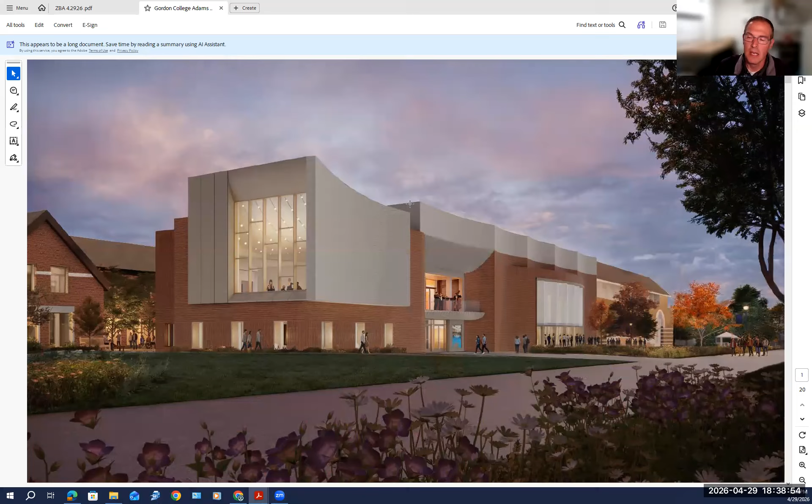With that being said, I'll hand it to Amanda to talk about the building, and then I can come back and describe some of the site features, drainage, before we go into that level of detail.

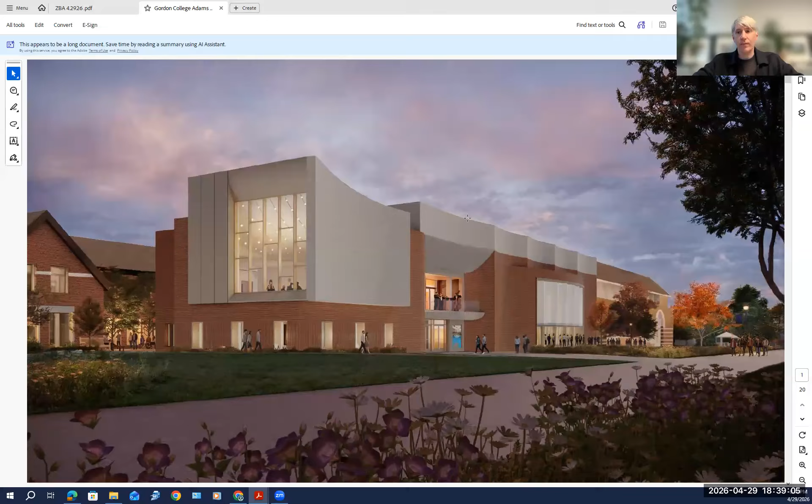Thanks, Jacob. So again, the Adams Center for Music, this is a project rendering standing towards where the existing AJ Memorial Chapel is, looking back at the campus with the Phillips Music Center behind it. The Adams Center for Music provides world-class spaces designed for educational classes, performance, and religious and worship events at Gordon College for students and faculty, including a 500-seat performance hall, large rehearsal rooms, spaces for public gathering, and associated support. The building itself is located central to the campus, set back from Grapevine Road, and surrounded by existing campus buildings. This placement positions the building along the central existing circulation corridor, shown here in this rendering as the path in the front.

And adjacent to the existing Phillips Music Center, this building is connected to that existing building at both the basement and second floor levels.

Robert Picardi, EJP Architects. So the building's been designed to complement and enhance the existing Gordon College campus in both character and scale. The primary exterior material is a blend of red and white brick. This material palette relates directly to the surrounding campus buildings, including the red brick and limestone found on Ken Olsen Science Center, that's the building in the distance, while also complementing the adjacent Phillips Music School, which is on the left portion of the image.

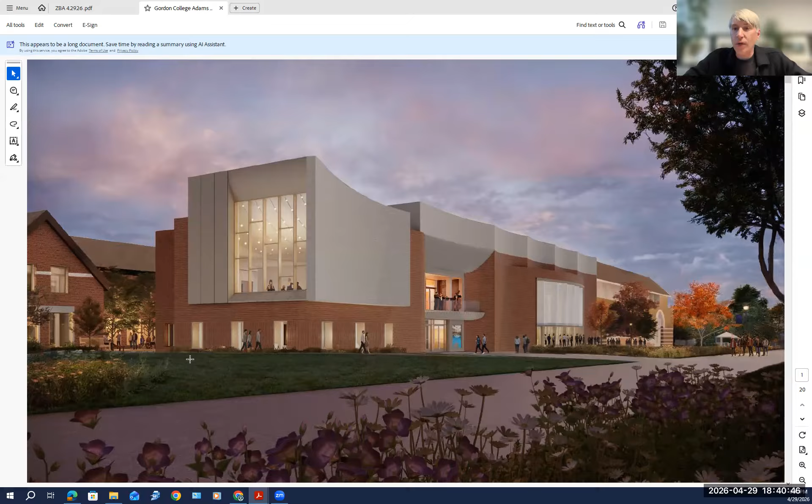We've also blended it with the A.J. Gordon Memorial Chapel, which is red brick and white trim. That might be the next image you can see, off in the distance there. So the intent is for the new building to feel integrated with the campus fabric while still having its own identity.

In terms of scale, the building is comparable to the adjacent Phillips Music School. The proposed building height is approximately 40 feet, which aligns with the roof eaves of both the Phillips Recital Hall and the Ken Olsen Science Center. The Phillips Recital Hall is off in the distance to the right, that's the white portion right there, and Ken Olsen is on the very far right.

For comparison, the overall height of Ken Olsen Science Center is approximately 58 feet, and the overall height of Phillips Recital Hall is 66 feet. Our building, at 40 feet, is approximately at the roof eave of those two buildings. So while the new building is consistent with surrounding eave heights, it remains lower than the overall height of the adjacent campus buildings. The overall project timeline: Gordon College is currently planning a ceremonial groundbreaking next month while students are still on campus, and formal construction work has not yet been scheduled, but the desired occupancy of the building is for fall of 2028, assuming a 24-month build schedule.

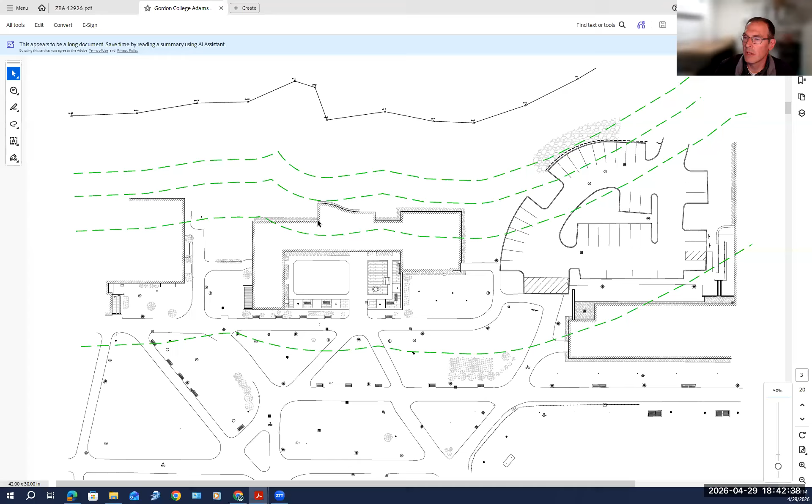So here's existing conditions. I'll note these green lines constitute conservation buffer zones. We were before the Conservation Commission on Monday and got their feedback on the project, and that's moving forward well. So this is the existing conditions.

So the general building area is going to be right in here, and we'll see that on the next sheet.

This is a color rendering of the building. The building's here in the brownish orange. You have the patios area in yellowish, both in between the buildings and at the front entrances. And then there's a reconfiguration of the main pedestrian ways that are also maintenance vehicle access ways in front of the building.

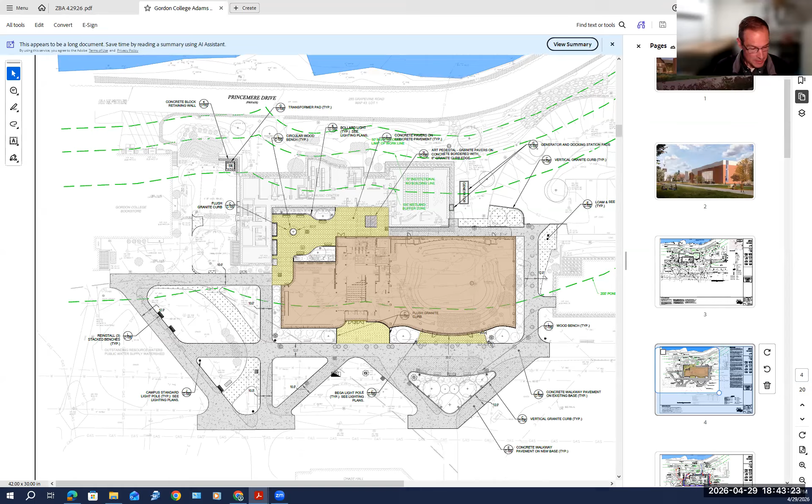One of the things covered in the narrative is parking. You can look at that in detail and read it for yourselves, but the general gist is that there's a tremendous amount of parking on campus for events if they were to happen, approximately four times more than needed even if both this and AJ Chapel were to be used.

But in general, the campus has no desire to do that because that would be way too taxing on their staff and infrastructure. They know this is much more of a building to accommodate what's already occurring on campus with classrooms and a performance area, to replace the chapel for that and instead have the performances in the auditorium here.

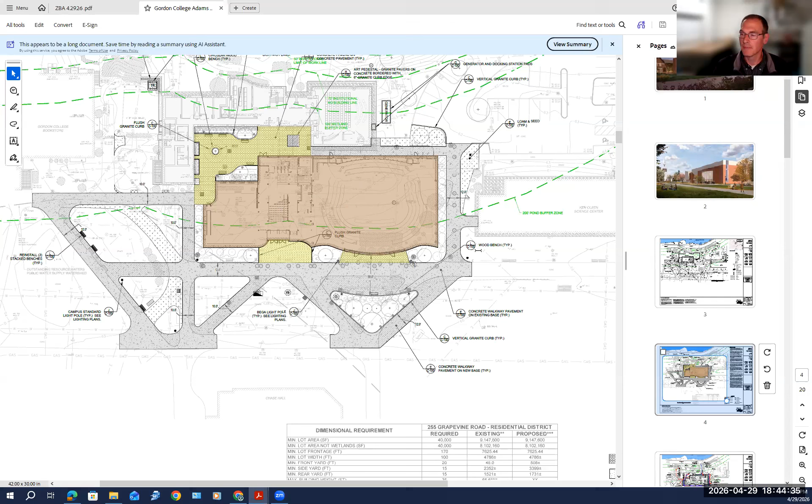Briefly going over drainage: there's a number of utilities that have to be rerouted, both mains that have to go around as well as to access and supply the system. In general, there is water capacity that will come from a main on campus, there's a sewer main they can connect to on campus, and there'll be a new transformer and generator to supply power to the building.

The increase in impervious area will create the need for underground infiltration. The soils have been found conducive to this, and the chamber system is in the front of the building. I'll mention now that the town has asked for a peer review of that, and the college is ready to move that forward whenever the town is ready.

So I know one thing that came up in general: cut and fill will be minimum because of the existing flat area in this location.

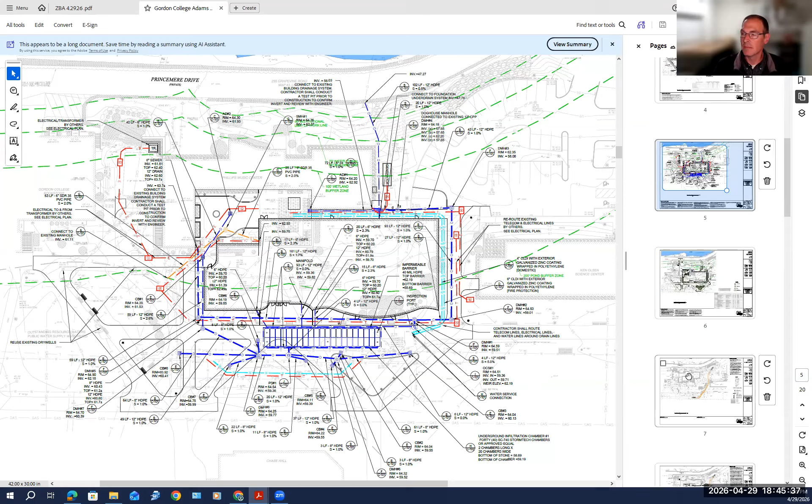We have supplied some emergency vehicle access diagrams showing that what is already allowed for in existing conditions will be allowable under proposed conditions, in terms of fire truck and ambulance access to the site.

And then there is a robust planting plan as well. I'll just highlight quickly where we are replacing the existing landscaping with more landscaping to beautify the outside of the building and provide for the courtyard area. In addition, in what's really already lawn areas right now on the downside near the internal campus road of Princemere Drive, we are providing additional trees to revegetate that area to meet conservation requirements for tree plantings.

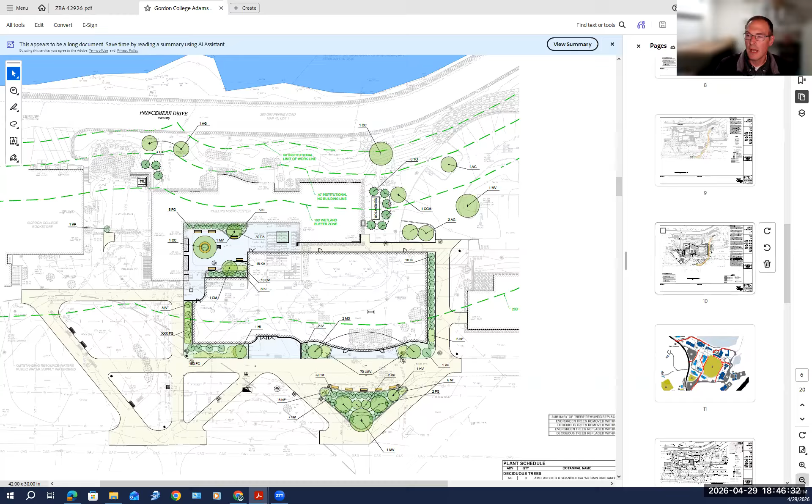Other than that, that's really the gist of the site and what is proposed. We received the letter that was passed on to us for the planning board, from the ZBA, from Hamilton Wenham Dark Sky. The college just got that on Monday at the Conservation Commission meeting, and has acknowledged receiving it, and we're looking into that with our lighting designer. In general, the campus is seeking to minimize extraneous light pollution. At the same time, as a college campus with a lot of evening activities, they also have to prioritize safety for student users and others on campus. But we can respond to that in a more robust letter with an illumination plan for the next meeting.

With that, if there's any questions from the zoning board.

Kelly, Amy, do either of you have questions at this point? I don't have questions at this time. Neither do I. I did read the letter submitted by Dark Sky, but I don't have any other questions at this point in time either.

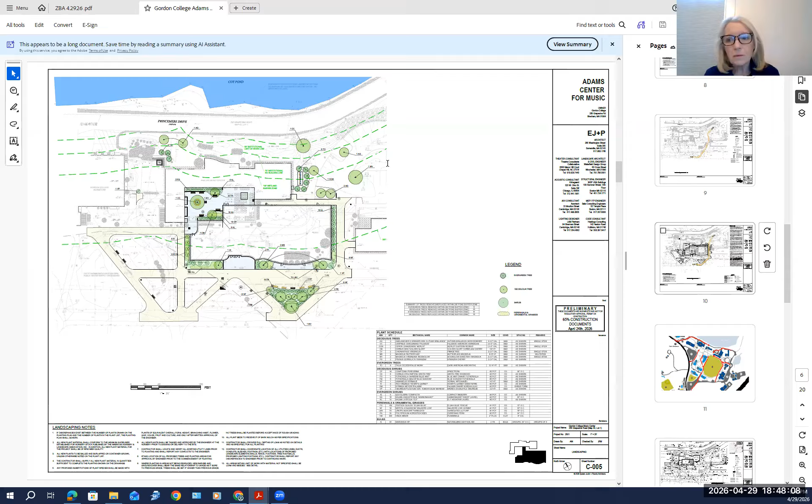If it's okay, Amy, I have just a couple things I wanted to bring up. Jacob, you mentioned you're prepared for us to do the peer review. We did get an estimate for that work, and Chris, I think I sent you an email. If you could get us a check for $4,900, we'll deposit that and get the peer review started. We have Weston and Sampson doing it. We got a couple bids, and theirs was the lowest, by far actually.

Margaret, this is Chris. The college is prepared to accept the Weston and Sampson proposal, and I'll have a check issued next week. Okay, terrific, thank you, so we can get started on that. Can we talk a little bit?

I'm sorry to interrupt, Margaret, but on the timing of that, I wanted to understand a little more. So we cannot contract with the peer review engineer until we have the funds in place. We were waiting for them to get us their scope, and they did that the other day. Once we get the check in place, we'll get the contract signed, and they'll get started on the work.

Do we have an idea how long it will take them? They usually turn things around in a couple of weeks on something like this. So the idea is we would potentially be coming back in front of you in a month. You're going to have to come back in a month? In a month, okay, yeah, there's no way to avoid that.

I understand, we don't have a quorum. We have a quorum for the meeting, but not enough to vote on the project. So you'd come back next month, and we should have the peer review back, like I said, in a couple of weeks, and then you may have to respond to some of his comments. Understood, so there's a little back and forth there, that usually takes a couple of weeks. So I think a month is a reasonable amount of time to get this peer review done.

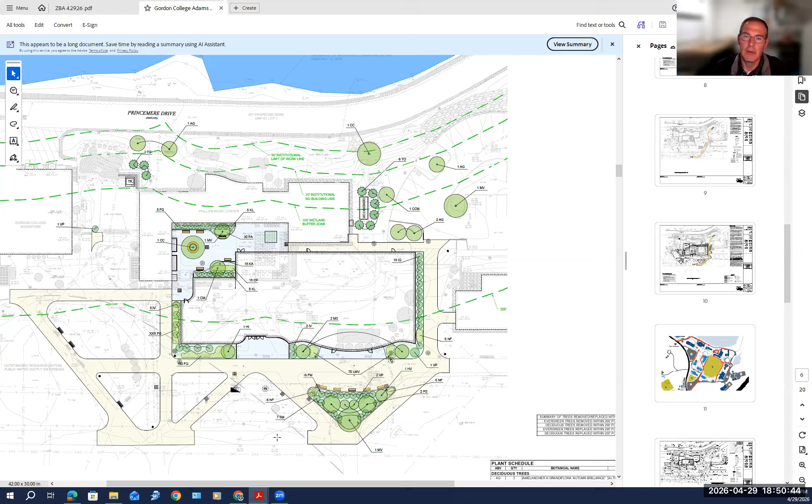So again, just a couple of things. Have you talked to the fire department about the access, Jacob? We had spoken with them at the initial meeting, and I think we had even supplied some of the emergency vehicle diagrams with them already. I haven't heard anything back formally, but they were very much aware of what's going on here.

Okay, great. Margaret, Chris Simming again. Today I met with Jeff Baxter on site as well, and we're also looking at some additional fire hydrant relocation to service the new building and surrounding buildings during and post-construction. Okay, great, so we'll wait for something from Jeff, and if you need to revise the plan showing new hydrants, we'll have that before the next meeting. Correct.

So that was really all the things that kind of popped out at us right at the beginning. So if you guys are okay, I don't know if any of the public have questions. I don't see anyone's hand raised. Did anybody want to speak?

No. So I guess Amy and Kelly, with the applicant's permission, you can vote to continue this hearing until, when is your next meeting? It would be May 27th, is that right? Yes, it's May 27th. Does that work? Yeah, that works for me.

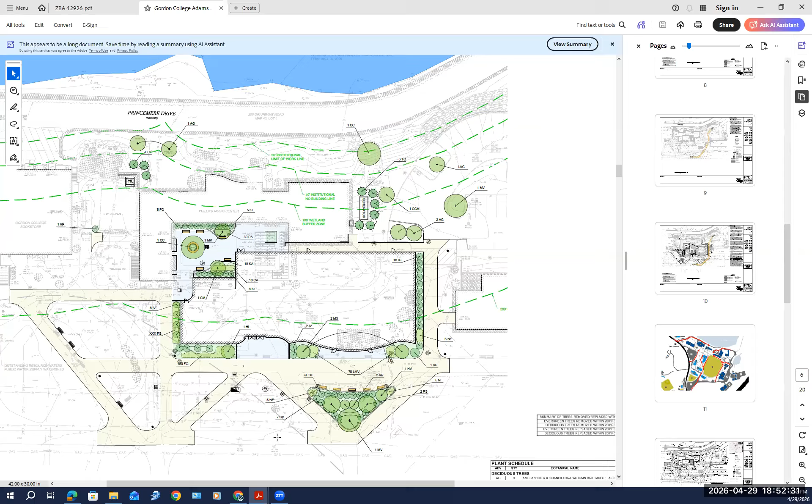Okay, oh sorry, my cat. So between Amy and Kelly, you can make a motion, as long as Jacob and Chris, you're okay for us to continue? Yes we are. Okay, all right, and we'll keep in touch over the next couple weeks on this.